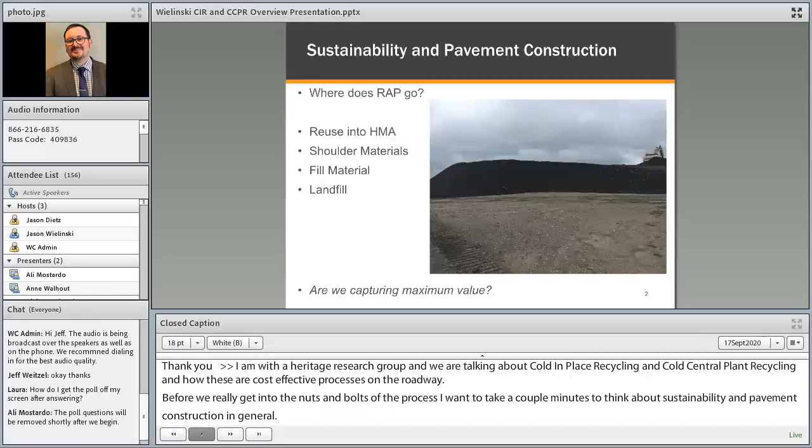Reclaimed asphalt pavement is a very valuable commodity. Ever since the advent of the milling machine in the 70s, we've been trying to find ways to reuse asphalt. As we develop more education and technology of how to reuse these materials, asphalt pavement has become the most recycled material in the world. There are opportunities where we can reuse it in hot mix asphalt and replace virgin material, which is an excellent use for RAP. There are other ways folks use RAP.

I see folks use it as shoulder materials or fill materials, or I even hear stories of how people use it in a landfill, and we're not really capturing or maximizing the value of that reclaimed asphalt pavement when we use it like that. So, thinking about sustainability and all the materials we use to build our roadway networks, I think about how do we create a need for continuing to develop and build growing pavement networks and programs, while trying to reuse a lot of the materials we've already invested in from an agency perspective.

I feel like we all have this responsibility to leave things in a better place than what we found it. I feel like when we can take materials and find a new home for them, whether it's RAP or other materials, and create less demand on virgin materials, we're doing the right thing.

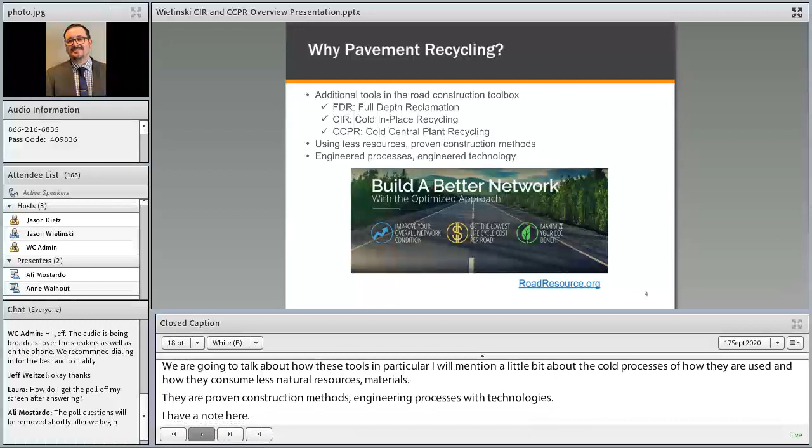So I have a note here, roadresource.org. This is a great tool for everyone to get more information, not only on these recycling treatments, but other pavement treatments, focused from the PPRA perspective, a really great tool, and we're going to dive into this.

So poll question number one: in-place asphalt pavement recycling can reduce construction greenhouse gases as compared to conventional mill and fill strategies by how much? Just curious what everyone thinks from an eco-friendly benefit for using recycled materials over conventional methods.

We'll give it a couple minutes so everybody can vote. Still see some votes coming in. A lot of our participants, 30 to 40% being the leading one right now, followed by greater than 50%. Some of us are in the 20%.

So final results, survey says everyone was thinking 30 to 40% savings. Well, in all actuality, data and information out there suggests that in-place recycling can reduce greenhouse gases up to greater than 50% on projects compared to traditional rehab technologies.

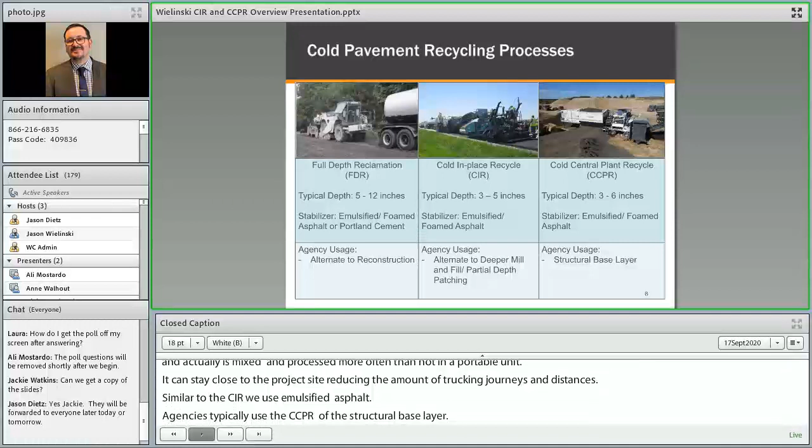Similar to the CIR, we're going to use an emulsified asphalt or a foam asphalt. And agencies typically use the CCPR as a structural base layer. So these recycle treatments, if we were looking at an AASHTO 93 design guide, some agencies suggest that they're up to 0.4 based on some research. Others use typically a 0.3 A1 coefficient, so much stronger than our aggregate bases that we're more accustomed to designing with, and getting awfully close to the design strength of hot mix asphalt as well.

Moving on to the next poll question, just wondering, for our agency folks out there: has my agency used the following treatments in our pavement network? Have we used FDR, CIR, central plant, 2 of the 3, all 3, or have we not used these treatments yet?

I'm really excited to see a lot of our participants have actually used all 3 of these treatments. That's amazing. We'll give it a few more seconds.

So many of us have used the FDR, 33 have responded using the FDR. 32 have used the cold in place recycle. Central plant, only 6 of us have used it. A few of us have used 2 of the 3. 25 have used all 3 treatments. And then a couple of us, 16 of us, have not tried these technologies yet. So hopefully for those that are looking for a lot more information on how to use these, I intend this presentation to help with a lot of that, to build some comfort level and information to share.

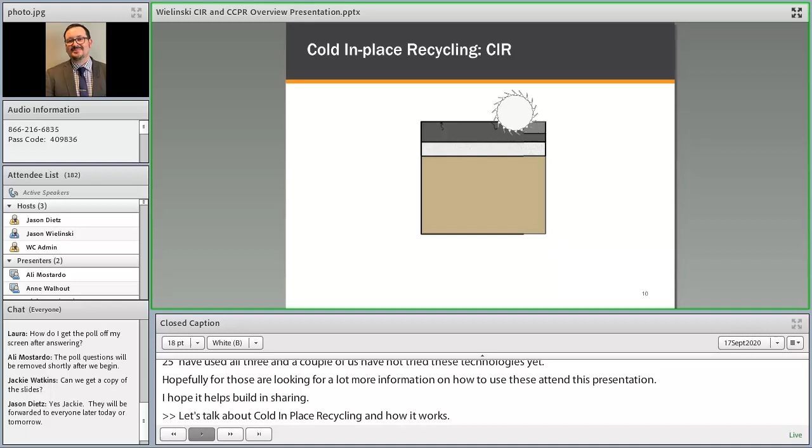Let's talk about cold-in-place recycling and how it works. Again, we're going to treat 3 to 5 inches of that existing pavement, thinking about pavements where that distress is a little deeper than just on the surface. We're getting deeper into it, and that milling machine is going to go through, take that RAP off. We're going to add a stabilizer to it, and we're going to pave it right back in place on top of the existing pavement without disturbing underlying layers.

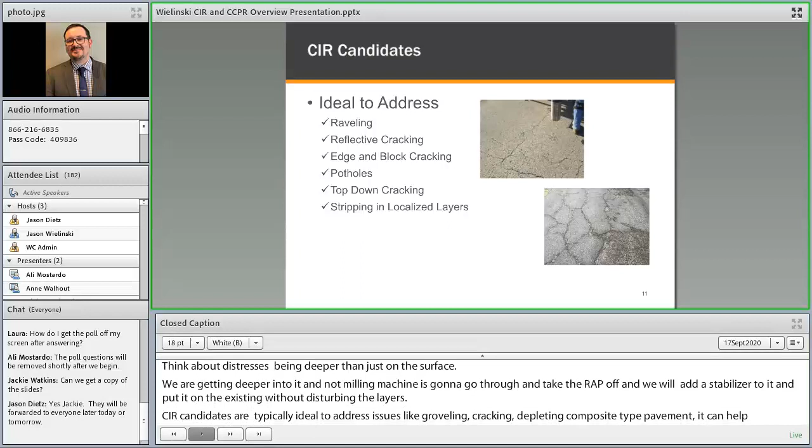CIR candidates are typically ideal to address issues like raveling, reflective cracking into the asphalt pavement, including composite-type pavements. It can help with edge and block cracking, age-related cracking, potholes. It can also help with stripping in localized layers. So as long as you can touch and grab it and get that stripped layer and get it mixed up throughout the rest of the pavement, we can remix that material and lay it back down in place for a good performing structural layer.

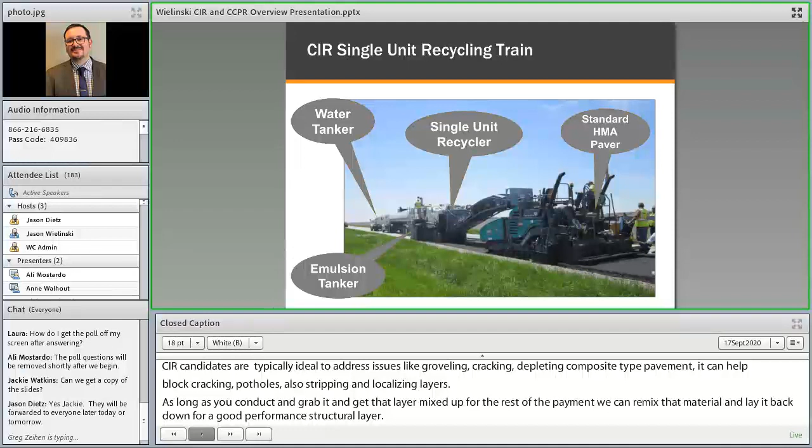This is an example of a single unit recycling train. It's pretty awesome the first time you see it, how you're so accustomed to seeing material getting removed from the roadway, and we bring a bunch of materials, come back, and we lay virgin materials in conventional methodologies. Well, we do that in this process. We eliminate all the trucking. It gets milled up, gets added in the stabilizer, gets added in that recycler, and it goes right back into the paver and gets laid down in place.

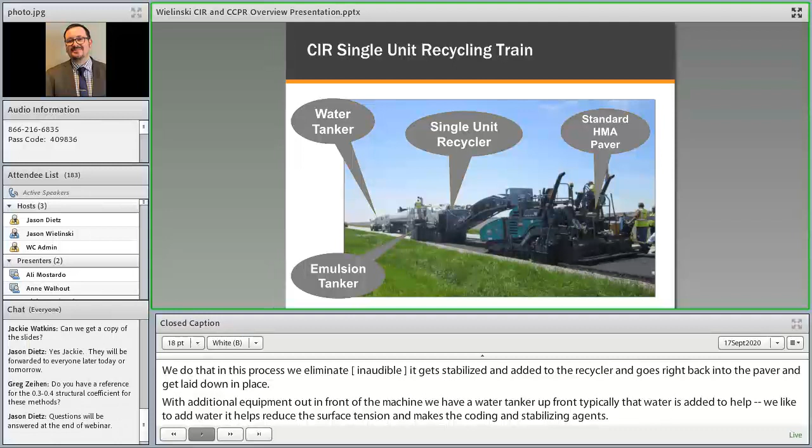We have some additional equipment out in front of that milling machine. We have a water tanker up front. Typically that water is added to help reduce the surface tension on the RAP and helps with the mixing and the coating of our stabilizing agents. And then we have our stabilizer tanker. In this case, it's an emulsion tanker delivering emulsion into that milling machine, and it goes straight into a standard HMA paver in this case.

There's also some other units, including a 2-unit train where it's a milling machine, picks it up, screens the material, mixes it, and puts it into the paver. I guess the important part is a specification can be written so that any type of cold-in-place recycling machine can show up and successfully perform a job. As with any types of machine, there might be some advantages with one over the other, but what I've found over the years is all these types of equipment can successfully build projects as long as the logistics are understood and the expectations are really understood.

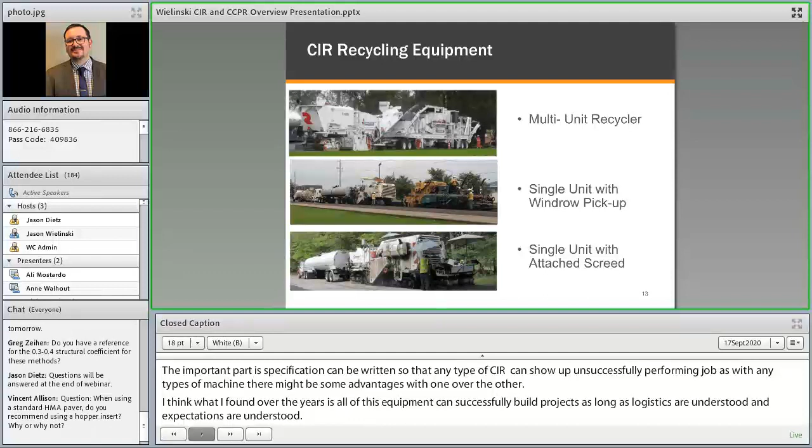Self-propelled milling machines with accurate spray pumps so that we are properly adding the stabilizer to the RAP milling, and then having the necessary lay-down equipment to successfully lay down a smooth mat to the correct lines and cross slopes.

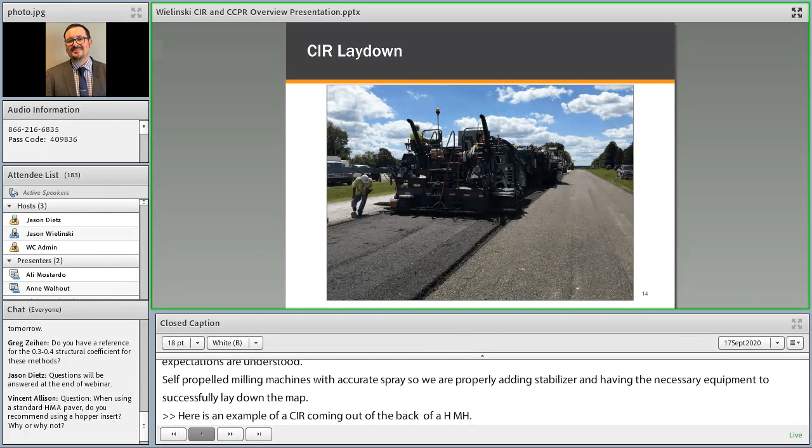Here's an example of a CIR mat coming out of the back of an HMA screed. You can see they're laying a CIR mat adjacent to a previously laid mat, just to give an idea of what these materials look like. It's definitely not hot mix asphalt.

It doesn't have that high black sheen type appearance we're accustomed to seeing with HMA mixtures. It comes out looking dark with some of the moisture present, and as it cures and develops strength, you can see it change colors a little bit.

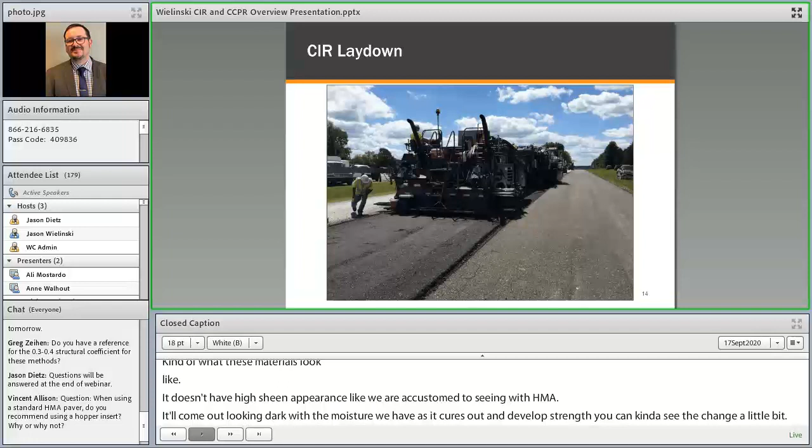Typically we use HMA paving equipment, heavy-duty pavers, good production, holding line and cross slope. We can successfully place and lay these types of materials.

Compaction is also relatively similar to hot mix asphalt. Typically we see 2 to 3 rollers on a CIR job. Usually we start off with a double steel drum roller in vibratory compaction mode to get initial density in these materials, and then...

Nearly all the specifications I'm familiar with also require a rubber tire roller, which does a really effective job of kneading compaction. With these materials being cold, the rubber tire helps orient the RAP particles and build really good density, which in turn builds really good strength in these CIR layers.

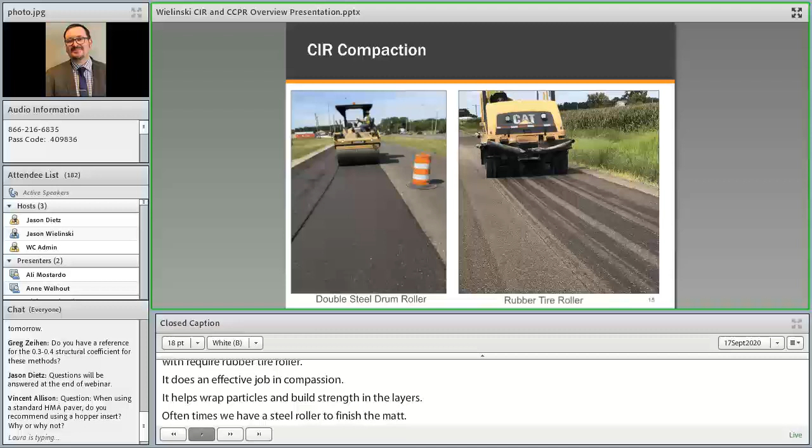Oftentimes we have another double drum steel roller to finish the mat after the rubber tire. Typically we see 2 to 3 rollers on these jobs to get sufficient density and, in turn, performance on these recycled type mixtures.

Here's an example of a CIR mat, a fresh CIR mat adjacent to one that had been laid a couple of days earlier, just to get a visual idea of what the material looks like.

The mat on the left was just placed when the picture was taken and is in the process of being compacted. You can see it's a little darker as the emulsion and moisture are beginning to escape from the pavement. Looking at the adjacent lane, it's a little grayer, a little duller.

While the moisture introduced in both the emulsion and the milling process is getting out, we're seeing what a typical mat might look like.

It's good to note that cold recycle - FDR, CIR, central plant - it does require a wearing surface. These materials typically have a higher void content than we typically see with HMA pavements.

When I say that, I don't want to paint the picture that it looks like an open graded friction course or a permeable drainage layer. It still looks like a tight mix, but we have a lot more smaller voids in it.

Which means it does have the ability to take on moisture, and we need the ability for it to release that moisture as well before we put our surface on top of it. Highly recommended to do that before winter, ice, and freezing in our northern climates.

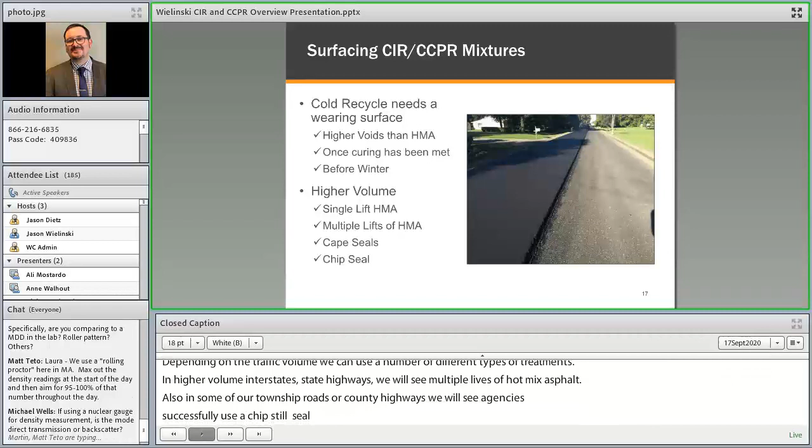At the end of the day, it's important to get the surface on these recycle layers and to ensure that we have the right type of surface based on the traffic that pavement's going to see.

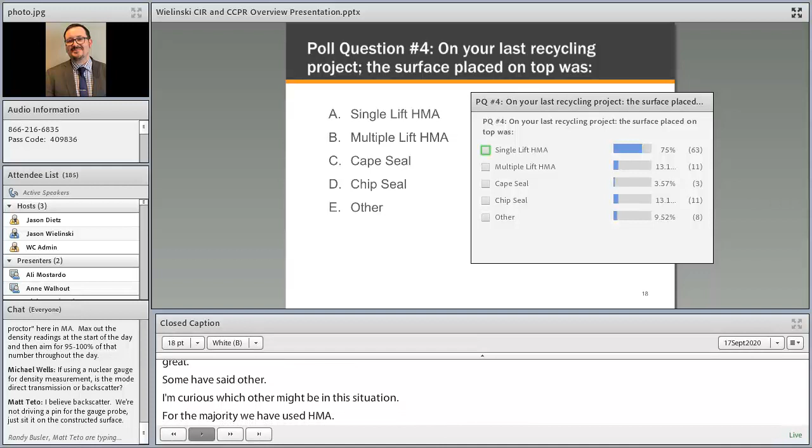So the recycle processes have a couple of main components that comprise the materials, and the first one being the reclaimed asphalt pavement, and for CIR it's the existing HMA.

We add a recycling agent, stabilizing agent, typically in the 2 to 3% range by the dry weight of the aggregate. In the CIR application, we're using an emulsified asphalt, or a lot of us are using engineered emulsions, emulsions that are formulated and designed to meet project requirements based on strength and cohesion development. Other agencies and contractors are using a foamed asphalt system, which acts as a stabilizing agent and gets good strength and performance in the CIR.

Other options include having some additives included in the recycle process, and sometimes we'll add a small amount, around 1% Portland cement, just to help with strength and stability and rate of strength development. Other agencies and contractors have successfully used quicklime or hydrated lime to help with adhesion. Some folks have used lime slurry, also to help with adhesion properties of the mixtures.

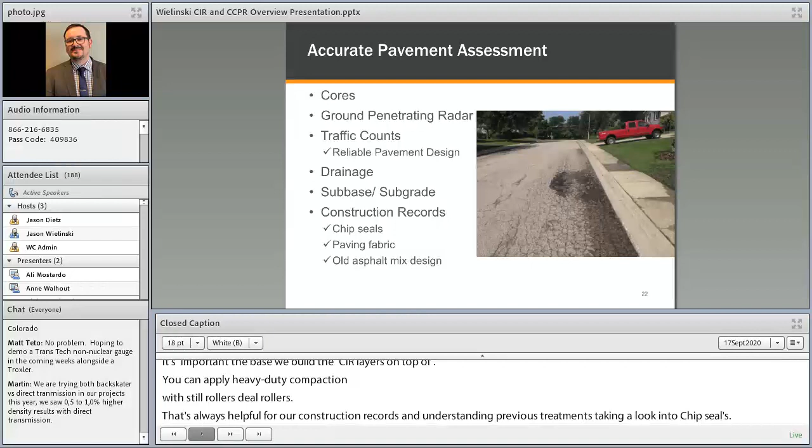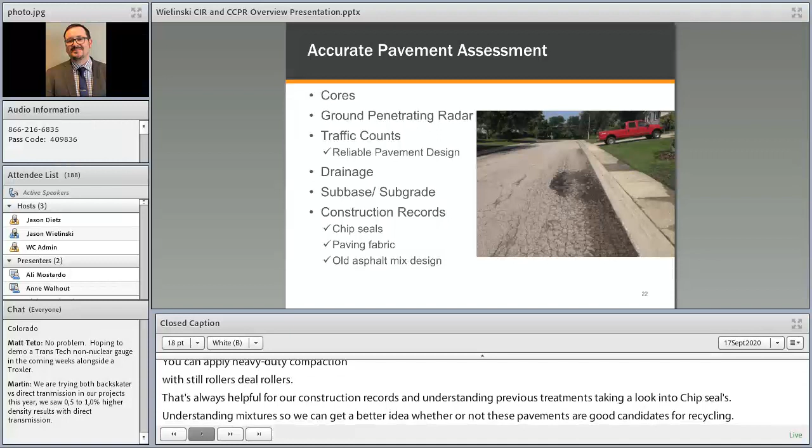It's always helpful to have construction records, understanding the previous treatments, taking a look to see if we're incorporating chip seals, if we're going to encounter paving fabric, and understanding what types of asphalt mixtures are hiding out in that pavement, so we can get a better idea of whether these pavements are good candidates for recycling. In the case of paving fabric, I've seen a lot of contractors successfully recycle pavements with fabrics. It's just having knowledge and understanding of it up front so they can plan for it.

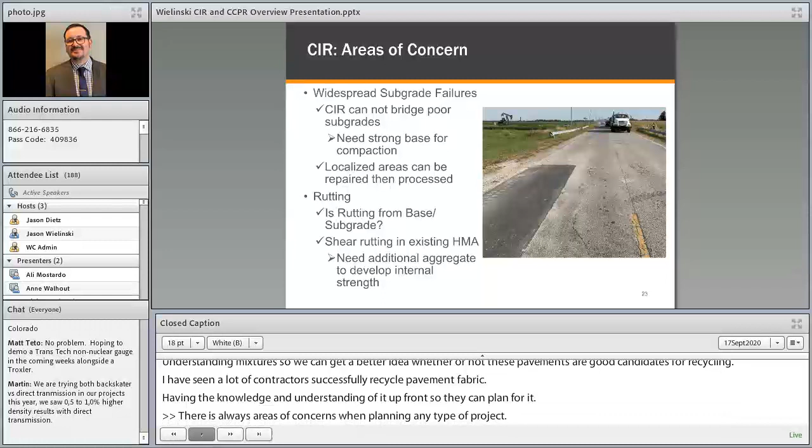There are always areas of concern when planning any type of project, and the first one I get real anxious about when looking at a road is understanding the subgrade of the pavement. Widespread subgrade failures, CIR might not be the best treatment for. I mentioned earlier that we need a good solid base to build density against.

If we have localized areas, we might have the opportunity to treat the subgrade problems, strength issues, drainage issues ahead of the CIR, and then come in and recycle through those patches. In this picture, you can see that we're recycling this pavement, and on that shoulder we had a soft spot where the agency dug out the soft subgrade, replaced it with aggregate base, and filled it in with temporary HMA. The CIR process will go through that patch and eliminate those seams so we don't have a potential construction joint reflecting through the HMA once the CIR is done.

It's always good to understand the rutting if it does exist on a pavement. Is it from the base or the subgrade? If we've got severe failures in the lower layers of the pavement, CIR might not be the best treatment for that, because we're not really fixing the problem.

In other cases I've seen a lot of shear rutting in the existing HMA pavement, and that's another issue to be concerned about, because we're going to take that mix, crush it down, recycle it, and put it back together. It might be very important and valuable to understand and plan on bringing some corrective aggregate or additional materials in there to help alleviate a future recurring shear rutting problem with that potential CIR mixture.

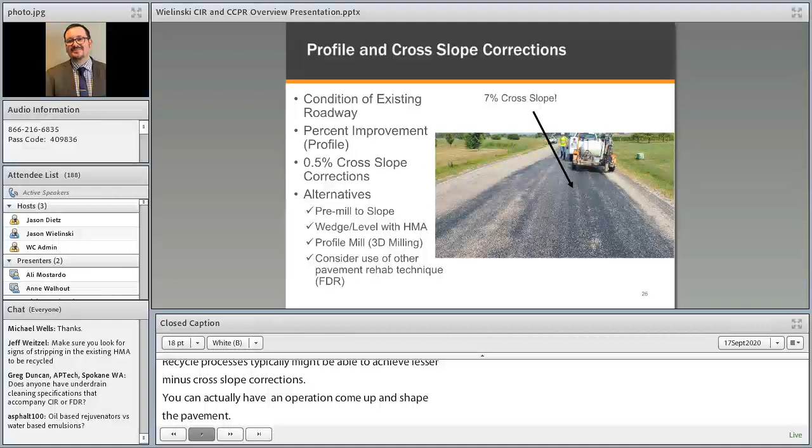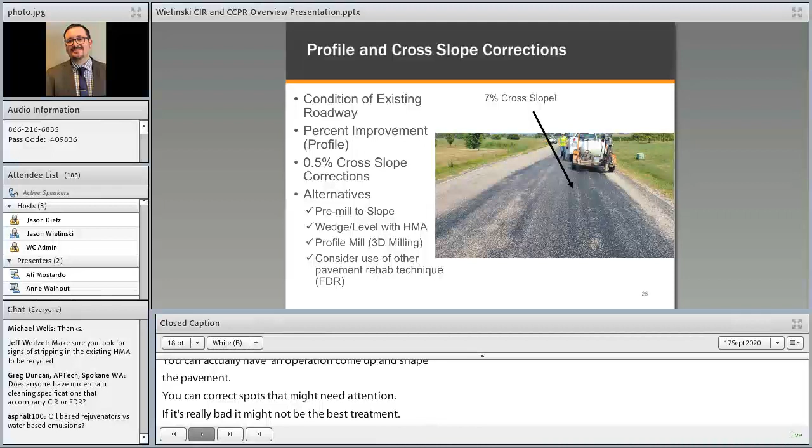So some alternatives to think about: you could pre-mill on that pavement, so you can actually have a milling operation come up and shape that pavement. You could also use some 3D milling. After the fact, you can do some wedge and level to help correct some spots that might need a little extra attention. And if it's really bad, it might not be the best treatment. So the FDR process might be a better treatment, for example, if there's a significant amount of crosslope issues that need corrected. It's one of those things that can be corrected with the two-step FDR process.

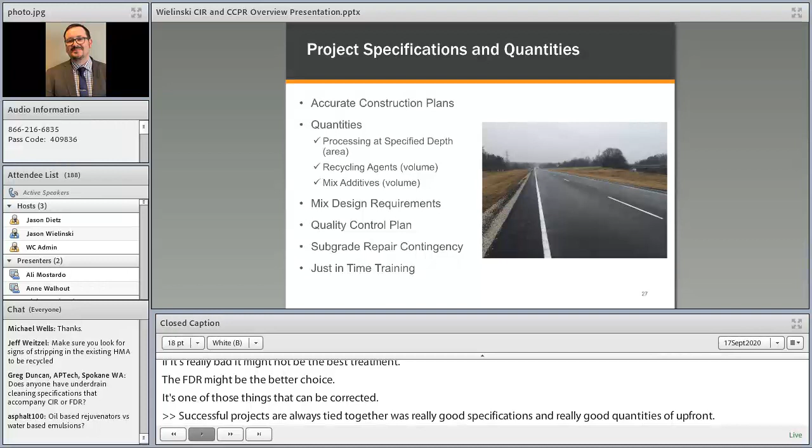Successful projects are always tied together with really good specifications and really good quantities up front, because in my opinion that really helps everybody get on the same page of what the expectations are, and that a lot of the homework's been done up front for materials, payment, and the process in general.

It really helps to have an idea on quantities. From the contractor's perspective, it really helps with planning when we're bringing out tankers of foamed asphalt or emulsion, understanding if additives are optional, required, or needed. Really helps with the bidding process and understanding the cost up front, what the treatment's going to take.

It's important that in those specifications, the contractors fully understand what the mix requirements are, quality control plans, and what is expected to be tested in the field to ensure that product is being constructed accurately.

I always like to have an idea of what a subgrade repair contingency is, just in case you hit a soft spot. How are we going to fix it? Are we going to dig it out and fill it with stone and HMA, for example?

And another tool that I think has been super helpful here in the state of Indiana, as we're learning how to build more of these across our state network, is just-in-time training. Just-in-time training is a small presentation where we get all the stakeholders together before the process, so our inspectors, our construction engineers, our materials engineers, the contractors, the QC personnel, and we walk through what the process will look like. Talk about the results of the mix design, talk about the equipment, talk about contingency if certain things occur in the field.

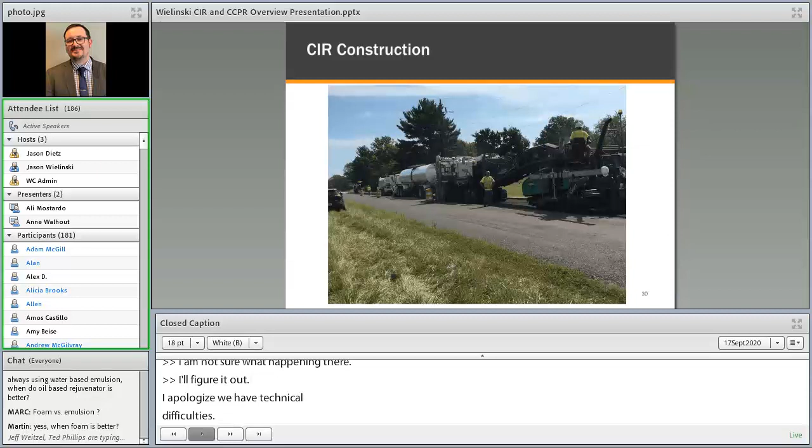So just a few things to think about as we are building these types of processes, and we'll talk about the construction process. So we're on slide 31. And the first thing we want to talk about is pavement sampling for a mix design. So once a project is identified, advertised, and successfully bid, typically the first step in the process is the contractor comes to the pavement and samples that project so that the contractor can put together a mix design for the recycle treatment.

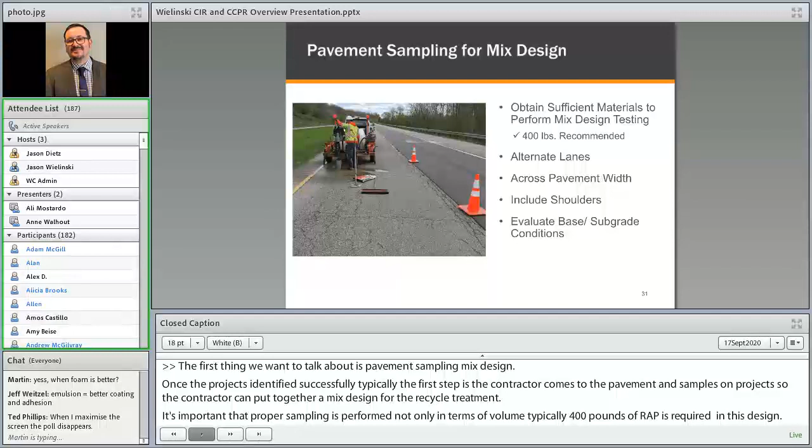And it's important that proper sampling is performed, not only in terms of volume. Typically, 400 pounds of RAP is required to successfully get through a mix design. But we want to make sure that samples are being collected in all lanes being recycled, and across the width of the entire pavement. There are a lot of times where we see pavements that have been widened over time, so the outside 3 feet of a pavement might be different than the inside 20 feet, where that pavement has been widened with a different type of material, or the shoulders were constructed with a different type of material. And it's important to include those if they're designed to be in the recycling process as well.

It's also another opportunity for the contractor to take a look at and evaluate the base and the subgrade issues. Typically what we'll use is a dynamic cone penetrometer to take a look underneath the asphalt pavement, just to get an idea if we see any soft spots or potential issues underlying the pavement.

So moving on, poll question number 6. What is the recommended spacing of field sampling and testing? One core per total job, multiple cores in one location, multiple locations across the entire pavement, adjust depending on unique areas that would otherwise be missed, or staggering cores across the entire section of pavement. And I think in this question, there might be more than one right answer. All right, we'll let it go for a couple more seconds.

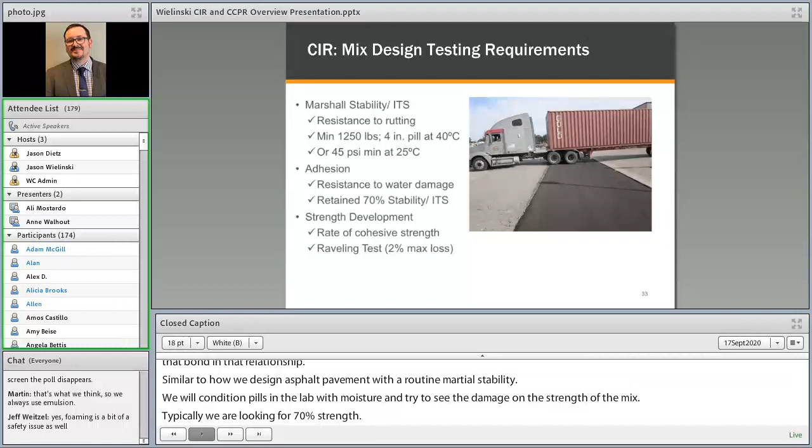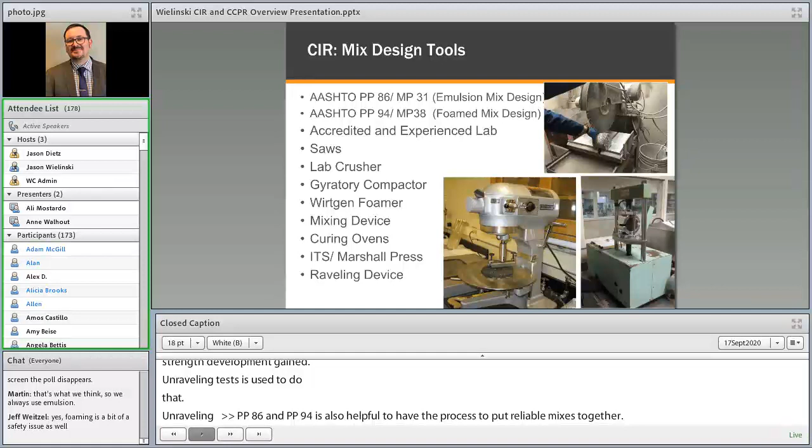A working foamer is needed if we're doing a foamed asphalt design because it simulates the foaming process in the lab that happens in the milling machine. We need different mixing devices, curing ovens, Marshall presses. Here's an example of that raveling device - it's a Hobart mixer that takes a partial cure sample around, and we want to look for mix loss over time.

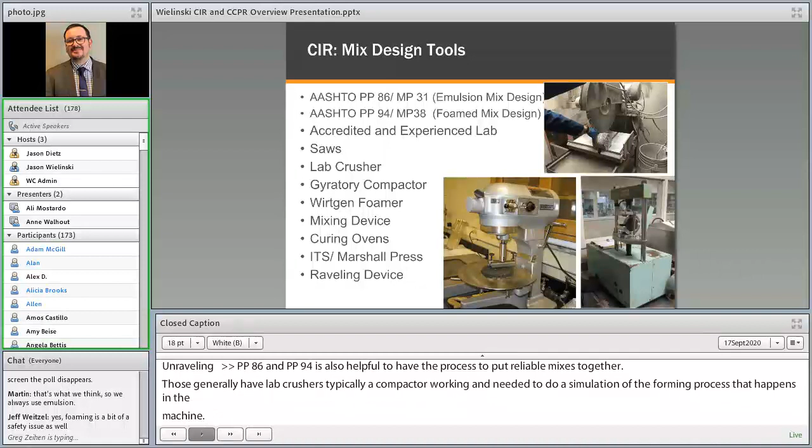Once we get out in the field and everything's ready to go, it's always important to think about safety on the job site, particularly maintenance of traffic - understanding where cars are coming in and out and how they're going to get around the job site. In terms of foamed asphalt projects, it's really important everyone's cognizant that that is hot asphalt in those tankers when hooking up to the milling machine. Typically that stuff is greater than 320 degrees Fahrenheit.

Always need to understand and respect the size and speed of the equipment. It's good for the contractor to have a spill plan in case there is a leak as they're transferring hoses, switching out tankers, and understanding how to respond to that in case it does happen.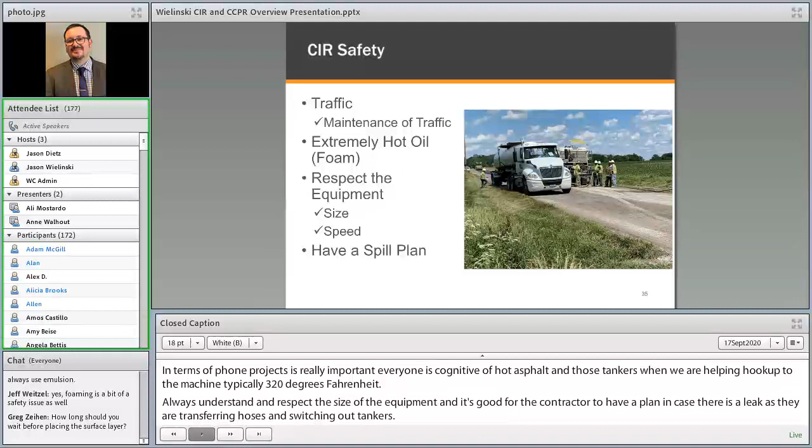Traffic control goes along with safety. The safest projects are always closed and open to local traffic, but with some projects that's not always doable. So it's important to understand the size and width of the equipment as we're trying to put traffic in and around the construction crews. Here's an example of a project where the CIR machines are going down the road and we're using the inside shoulder to keep moving live traffic around the CIR operation.

It's always a good rule of thumb to have a work zone of 2 miles or less. The paving train moves against traffic - that prevents vehicles from stopping on a fresh mat as they wait for the flagger to let them go through. Flaggers are always needed, pilot cars recommended if sight distance remains a problem, and always keep your head on a swivel out there because there's a lot of moving parts - rollers, tankers, water trucks, milling machines, live traffic.

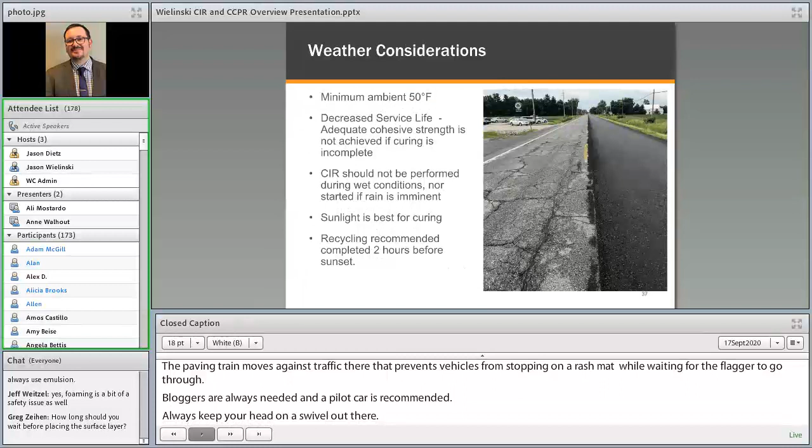Weather considerations are important for these processes. It's important to have a minimum ambient temperature of 50 degrees in most cases to get the emulsion or the foamed asphalt to activate and stabilize the materials. If we have reduced temperatures, it can reduce the service life of the CIR because it doesn't have the ability to gain strength as that water is curing out of the emulsion. So it's important to be cognizant of when these are going to be built also.

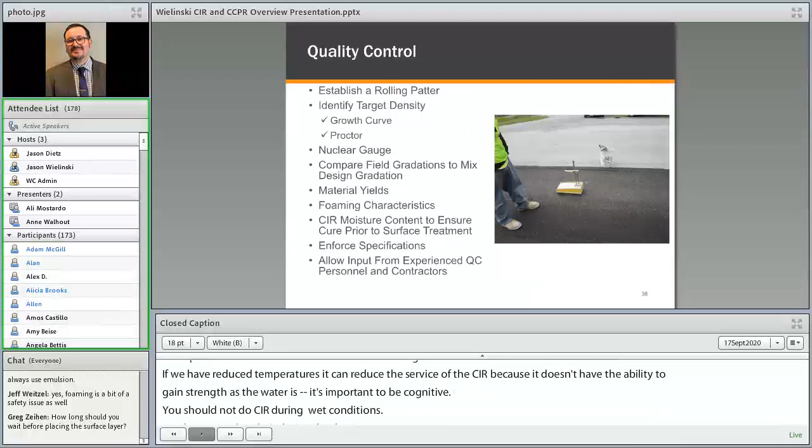We should not do CIR during wet conditions or if rain is imminent. It's always good to do these during the daytime. Sunlight is best for curing, and recycling is recommended to be completed 2 hours before sunset.

Quality control, always good to have a good solid plan up front. First thing is establish a rolling pattern. Identify a target density. Generally with a nuclear gauge, we're going to do a growth curve and check a peak. Generally with these being 3 to 5 inches, we're going to use backscatter on the gauge. I've seen other folks use a wet proctor to set the peak density number or target density, and then with the gauge we're going to have a typical requirement of 95 to 103% of that target density.

We like to take gradations in the field to compare to the mix design to ensure that we're going to have similar expected results to the mixed design in the field. We always want to check our material yields to make sure that the equipment is metering in the desired stabilizing and additive types. We always want to check the foaming characteristics if we're using foamed asphalt. We want to check the moisture content of the CIR prior to overlay. We don't want to trap moisture in that mix, and we want to make sure that it's not overly wet to create issues in the hot mix that's going on top of it.

Be sure to expect those conditions to be met, and always ask for input from experienced QC personnel and contractors, because there's a lot of experience and there's a lot of conditions that we can overcome in the field with the right planning ahead of time.

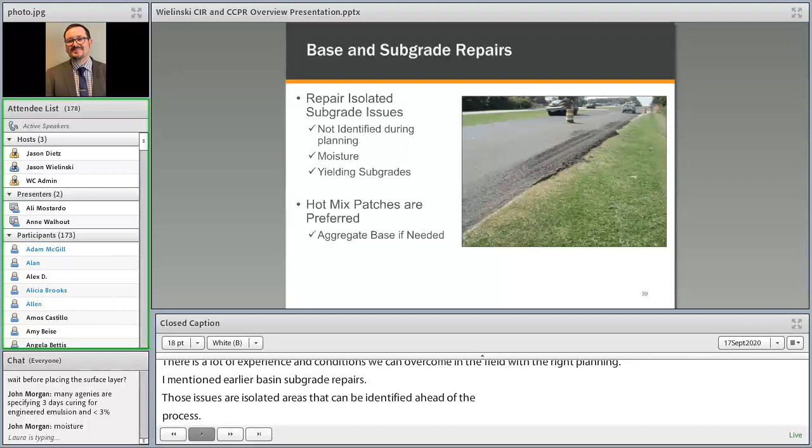A little note on curing. Rolling traffic is helpful to help drive moisture out of the mixtures. Sunny and hot days will help accelerate that cure, and when it rains, it does kind of pause it and slow it down. So it's important to understand ambient conditions as that material wants to dry out and gain strength before we get it covered. Typical specifications are 2 to 3% or below in the CIR mat before we want to cover it.

And we really don't want to apply those surface courses on top if there's too much moisture. For one, if we trap a bunch of moisture in, it might damage the CIR over time, and it can also impact the constructability of the hot mix on top. If there's a bunch of moisture hiding out in the CIR layer and we put that hot asphalt on top of it, that moisture can wick up and create some constructability and some tenderness issues with that hot mix asphalt. So it's really important as part of the quality control that we make sure that moisture is out of that pavement.

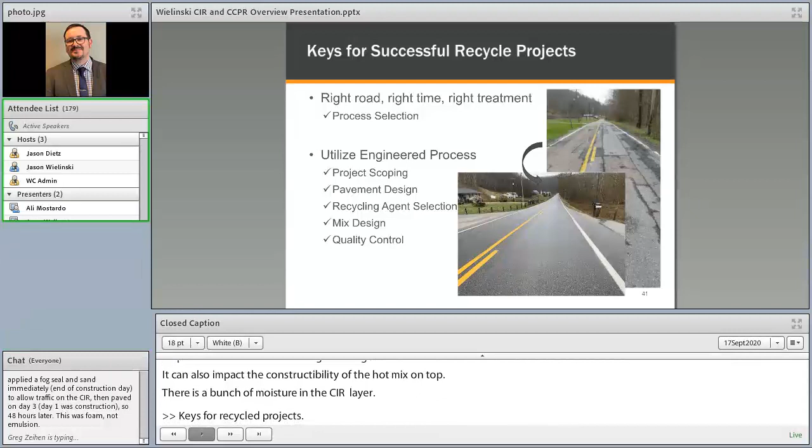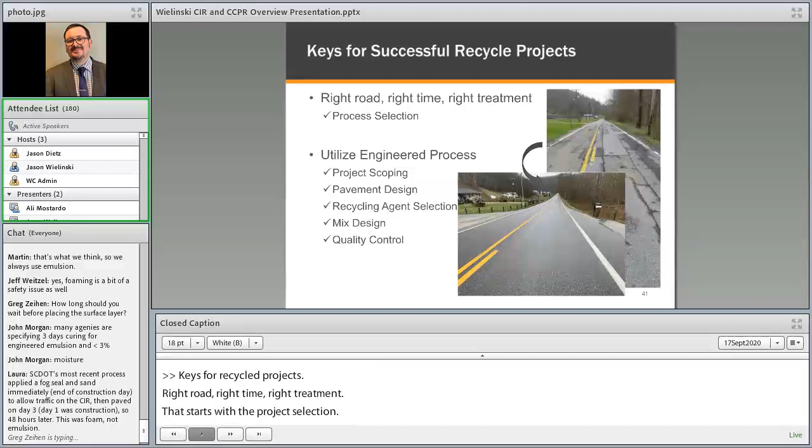And again, key for recycle projects: right road, right time, right treatment. It starts with the project selection. Utilize that engineered process with the scoping, the proper pavement design. Think about the right recycling agent for your project. Get a good mix design done, and make sure that we're getting the right quality control in the field.

So would like to do a little project walkthrough. The project I'd like to share is one that was constructed in the state of West Virginia back in 2015. It was a 4-lane divided highway, high-speed route, pretty rough shape. It was a composite pavement, asphalt on top of concrete. We were looking at 64,000 square yards of CIR that was going to get covered with a 2-inch HMA surface.

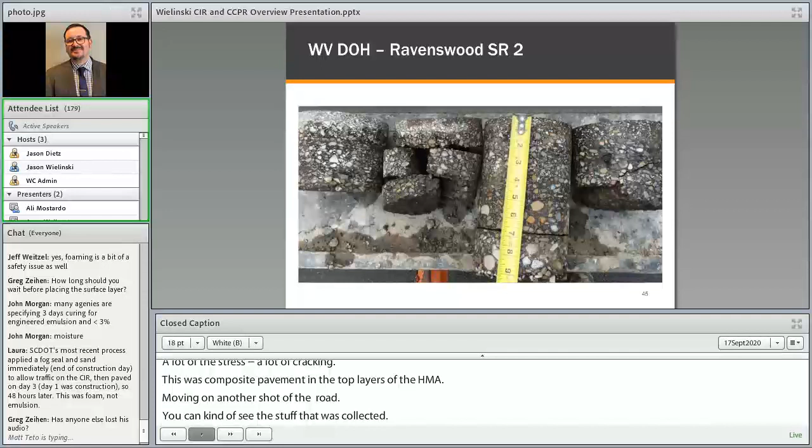Another shot of the road there, and you can kind of see some of the distress that we saw in the cores that were collected. So a lot of cracking throughout the top 4 inches that were going to be targeted to be treated with the CIR. Maybe some potential stripping issues in some of the second and third layer.

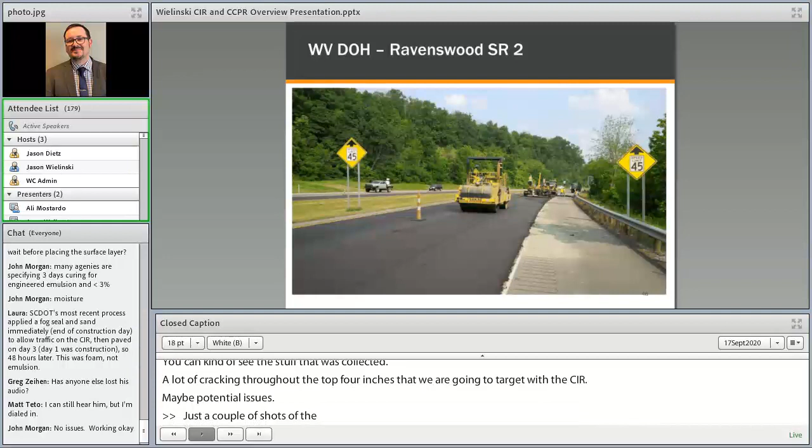Just a couple shots of the process. We could see that the compaction of the CIR is happening behind the paver. And I would like for everyone to note the shoulder that's tied adjacent to it. The shoulder wasn't treated in this case.

Shoulders are real tricky in the sense that, as I mentioned earlier, the CIR has a higher air void content than HMA, and in this case a really old HMA pavement. Think about shoulders and how that might retain moisture if there's a rain event. I always recommend agencies to think about shoulders because we really don't want to create a bathtub if there's significant rainfall, and we have to worry about that moisture getting out and extending the curing time, if you will, before that HMA overlay can go on.

Here's another picture of the completed CIR mat. Again, you can kind of see the inside shoulder there getting constructed. So a shot of the mat, completed pavement.

And we're always curious about, well, it's a recycled pavement, how's it going to respond to traffic in real time after compaction? The guys at West Virginia DOT, particularly Travis Wallbach, shared these photos with us in other presentations. And I love this picture of the semi coming across, turning across this mat at an intersection in this highway.

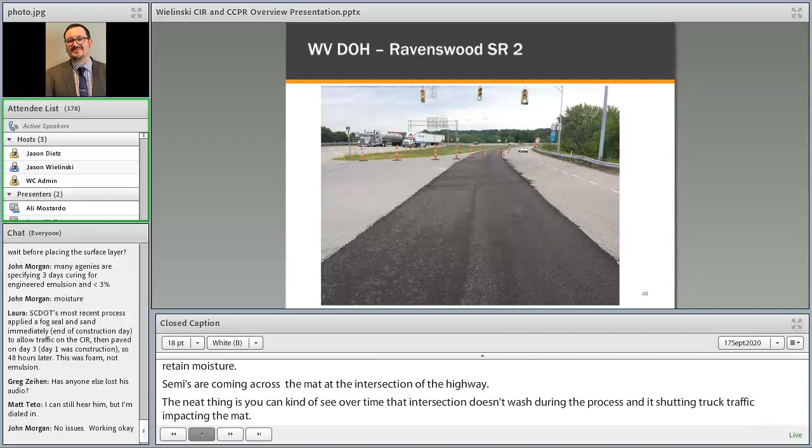The neat thing is you can kind of see over time that intersection was definitely watched during the process, and that slow turning, shoving truck traffic didn't really impact the mat. You might see the tire marks on the top, and you could see some roll off to the side at the cold joint, but that mat really didn't distort, rub, or shove after traffic.

You can kind of see another shot of the emulsion tanker as it's leaving the project. And those wheels as they turn, they kind of shove laterally a little bit also. And we didn't have any issues with the roadway there.

So how does it look now? This was a picture taken back in 2018. Roadway looks pretty good, no reflective cracking coming back up through the concrete yet. Again, that was only after 3 years.

Another shot of what that intersection looks like. So no rutting from the slow stop truck traffic there at that intersection. Took another shot of that roadway in March of '19 after another winter. Again, we didn't see any reflective cracking coming back after 4 years.

Now if we take a look at it now, this picture was shared with me by the West Virginia guys a few weeks ago, and that pavement's in really good shape, and it's not showing any rutting or appreciable cracking at all.

So how do you measure performance? One way we often do that is ride. The International Roughness Index is a measure of smoothness, and typically a higher number represents a really rough ride where a lower number is smooth.

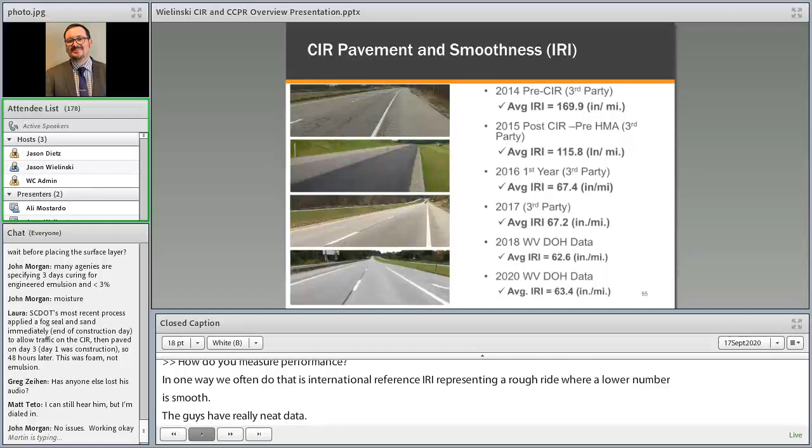The guys at West Virginia shared this really neat data where we did a 170 before the CIR. It was actually measured after the CIR, it dropped down to a 115. After the HMA was placed, it was below 70 at 67. And today, as we continue to measure ride on that pavement, it's still in the low 60s. So in terms of ride and smoothness, it's performing quite well.

Moving on, poll question number 7, just curious, what is the maximum allowable RAP in your state HMA mixtures? Just curious what everybody can put into their HMA in terms of RAP. Give it a few seconds.

Leading candidate is 10 to 25%. Some folks are using 25 to 40%. That last one should be greater than 40%. Some folks do not allow RAP in HMA mixtures. Interesting. We'll give that a couple more seconds.

So in general, 10 to 25% RAP is generally accepted into hot mix asphalt. So as we take RAP off of projects, only 75 to 90% of it's going potentially right back in. So just want to think about where does all that extra RAP go, and where can we find really useful homes for that RAP, because I think it's definitely an opportunity for us to think about RAP management and how we reuse a lot of the material that we've already invested in.

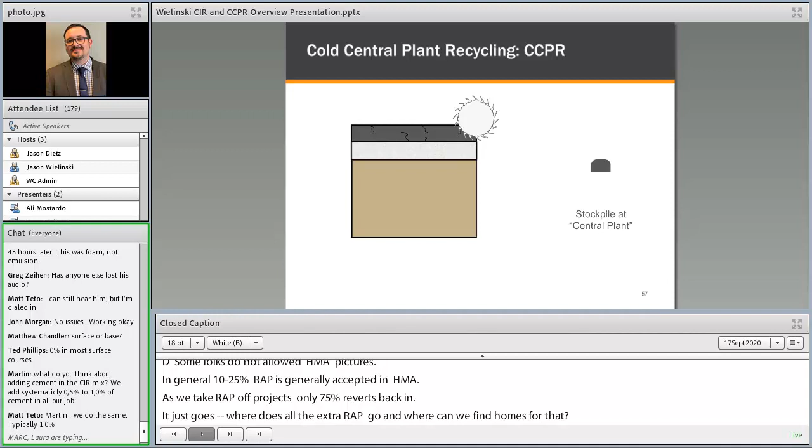Cold central plant recycling is the next treatment we're going to talk about. It's a neat treatment in the sense that we're going to take a distressed asphalt pavement and take it off, because sometimes we have to get below that asphalt pavement to see what's going on and fix it. It could be a base issue, concrete joint repairs, or base stabilization. We're going to take that asphalt pavement off the roadway, stockpile it at a nearby location, treat it, and place it back on the roadway after we fix that problem below the asphalt pavement.

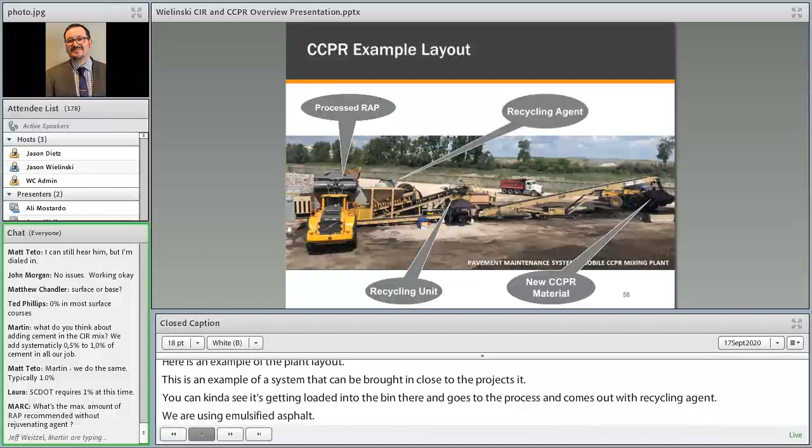Here's an example of a cold central plant layout. This is an example of a portable pug mill system that can be brought in close to the project site to process and coat that RAP. You can see it getting loaded into the bin, going through the pug mill process, coming out, getting added with a recycling agent. Similar to CIR, we're using emulsified asphalt or foamed asphalt. It goes into the pug mill where it's mixing the RAP with that stabilizing agent and comes out and gets stockpiled as a new cold central plant material, all cold. We're not adding any heat in this process.

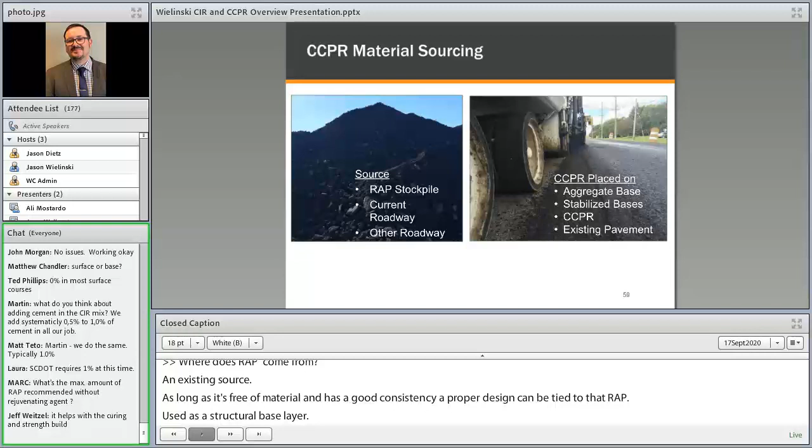Where does RAP for central plant come from? It can come from an existing RAP source. As long as that RAP source is free of deleterious material and has a good known consistency, a proper design can be tied to that RAP pile, and it can be used as a structural base layer on projects. It can come from a current roadway where we take that RAP, send it down the street for shipping and handling, fix problems below it, bring it back, and lay it back down as a base layer. Or we could take it from one roadway and use it as a structural layer on another.

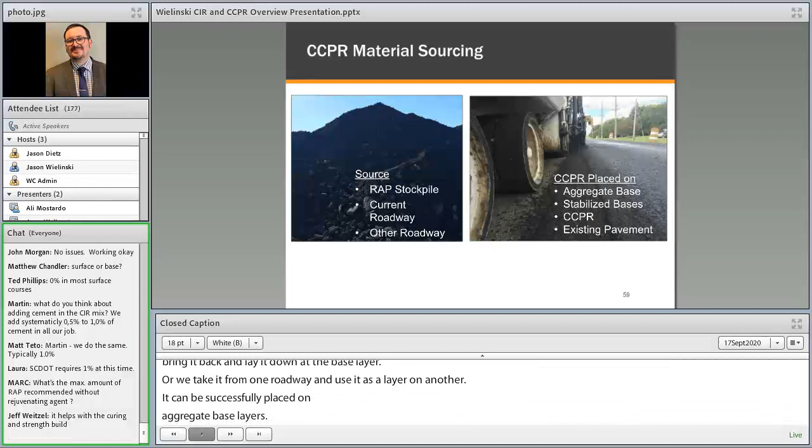It can be successfully placed on aggregate base layers. We see a lot of local agencies here in the state of Indiana and across the Midwest upgrading gravel roadways to hard surfaces using cold central plant type materials. We see it on stabilized bases, particularly cement FDR treated subgrades that needed some foundation improvement. We've seen double layers of recycles on top of each other. IDOT District 6 just did a pretty neat project where they used cold central plant in a double lift application to replace some shoulders. And we can place it on top of existing pavement if we need to add structure.

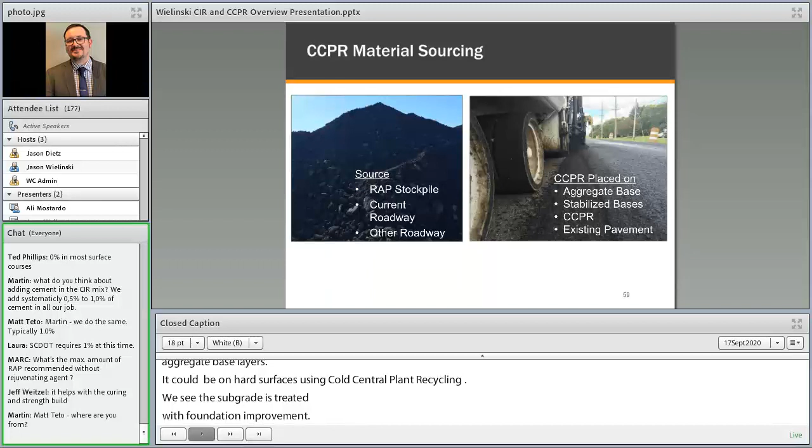It's really similar to the cold in place process, except we had this shipping and handling where we handle the material off the pug mill, load it into a truck, and deliver it on site. With these materials, I think it's good to have a window associated with workability. It's really important for the contractor, the material supplier, and the agency to all get up front about where that location is going to be so that material can be mixed and processed and hauled to the site with enough workability to get through the paver and build density in that mat.

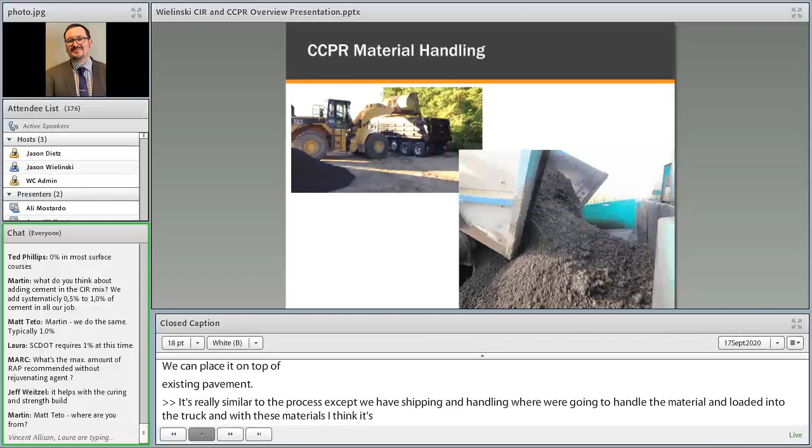When we think about the other similarities to CIR, we spent a lot of time talking about the construction process, the laydown, and the equipment, and it's very, very similar. Similar paver and roller requirements, mix design and QC - our requirements are very similar in these processes. And the pavement performance also is pretty typical since we're using a lot of the same types of materials at very similar application rates.

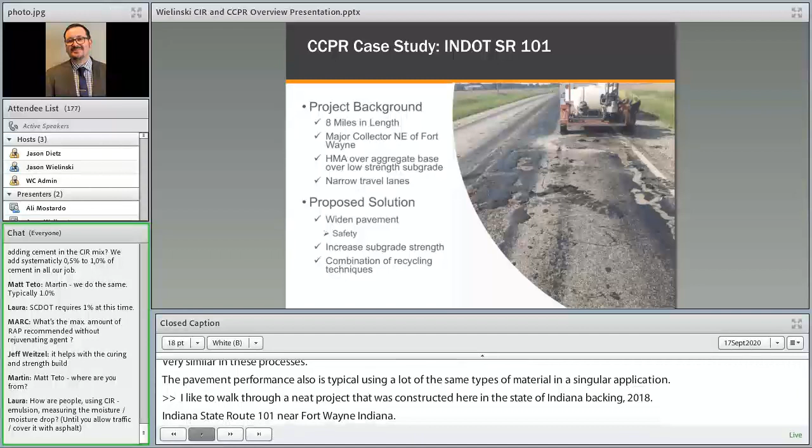I'd like to walk through a pretty neat project that was constructed here in the state of Indiana back in 2018. It's Indiana State Route 101 up near Fort Wayne, Indiana. It was an 8-mile project in length, a major collector near the Fort Wayne area. We had HMA over some troubled subgrade aggregate base. It was also a pretty narrow road, so widening was one of the desired outcomes for any reconstruction or construction process.

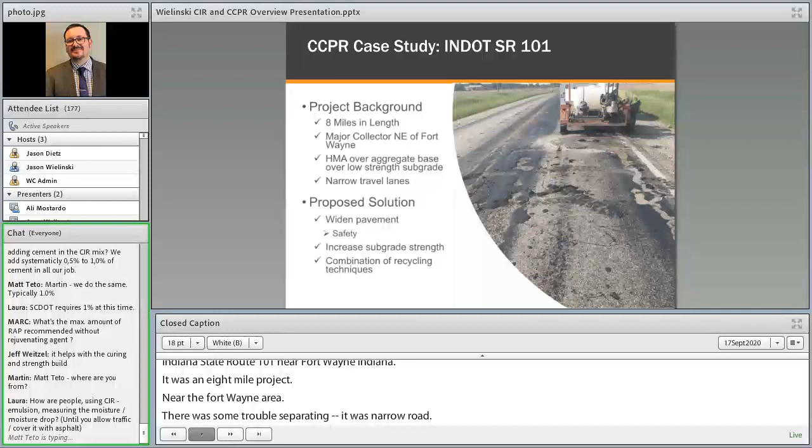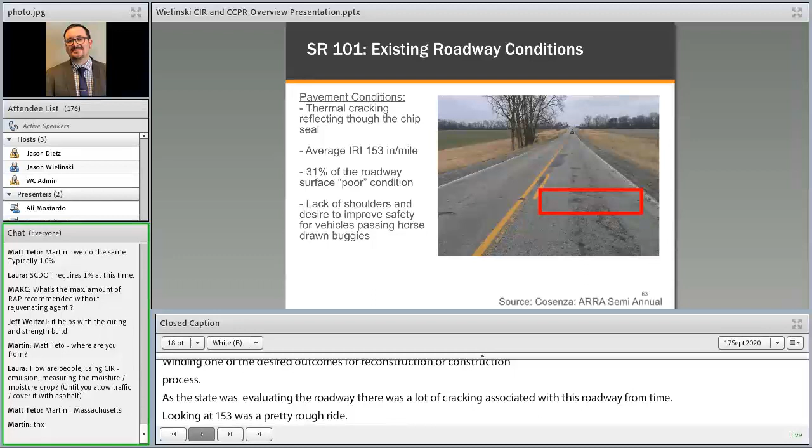As the state was evaluating the roadway, there was a lot of thermal cracking associated with this roadway over time. Looking at smoothness, this was a 153, so this was a pretty rough ride, and about 30% of it was deemed poor quality based on their pavement management system. The lack of shoulders really drove the state of Indiana to want to think about widening this pavement from a safety perspective. I really appreciate Nick Cosenza for letting me use the slides that I used last year at the ARRA Technical Conference to help tell this story, but it really goes to show what kind of problem this pavement had.

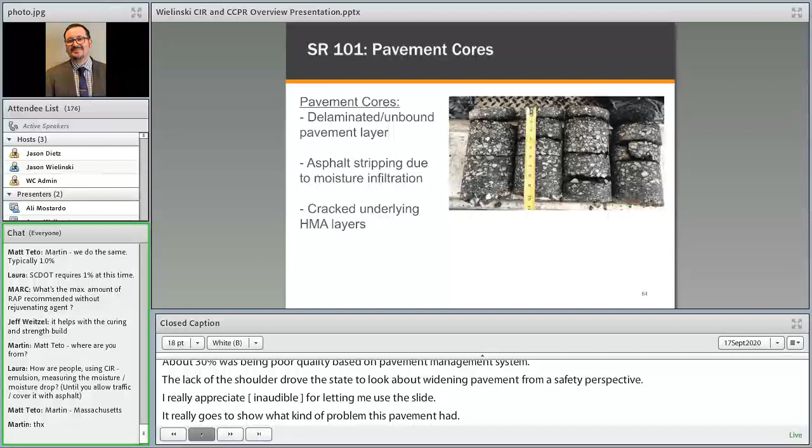A little note on the cores - it did have some delamination issues both with the surface treatment and within the cores. There was some asphalt stripping from moisture infiltration and a lot of cracking in those lower HMA layers.

This is a neat point in the Indiana DOT's knowledge and experience with recycling. They were writing specifications for CIR and FDR, and I think this project came up, and it was like, well, we really want to recycle the asphalt, but we know we need to get into the subgrade.

That's when we started talking and looking at the stuff that was going on with the state of Virginia and their Cold Central Plant recycling program. And it dawned on the engineers, hey, why don't we try this here? And we can couple the FDR technology with the Cold Central Plant technology.

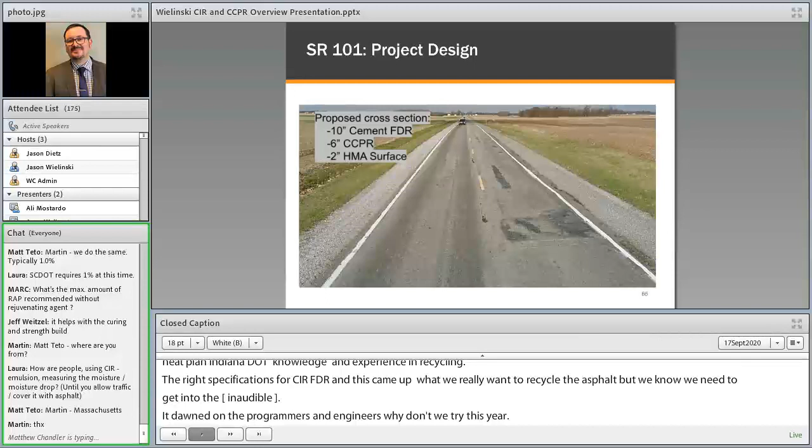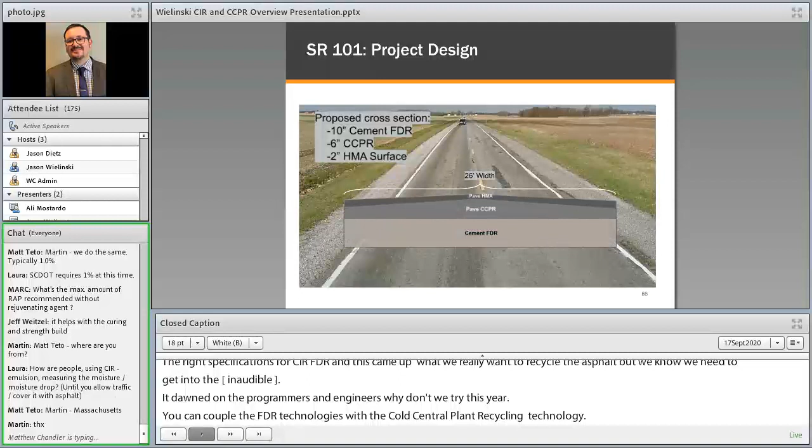So the idea was to take that existing 20-foot width pavement, take the existing asphalt off, and widen that base to 26 foot with the FDR process. We're going to pave on top 6 inches with the central plant recycling, and then cover that with a 2-inch HMA surface.

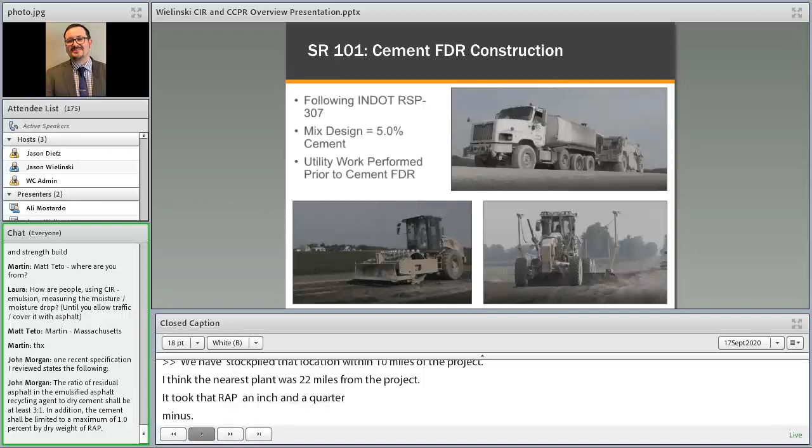Here's a look at some of the FDR operation. It followed the recurring special provision INDOT had at the time for cement FDR. They used 5% cement in the design, and all utility work and pipe crossings were performed before the FDR process, which was really important.

And just some interesting statistics about the central plant construction. At the time, it was recurring special provision 417 in that spec book. The mix design called for 2.5% engineered emulsion, which was added to the pug mill shown a few slides ago. It was laid down by a local HMA contractor to the Fort Wayne area, and 37,000 tons of that cold central plant mix was produced and laid in a period of 16 days.

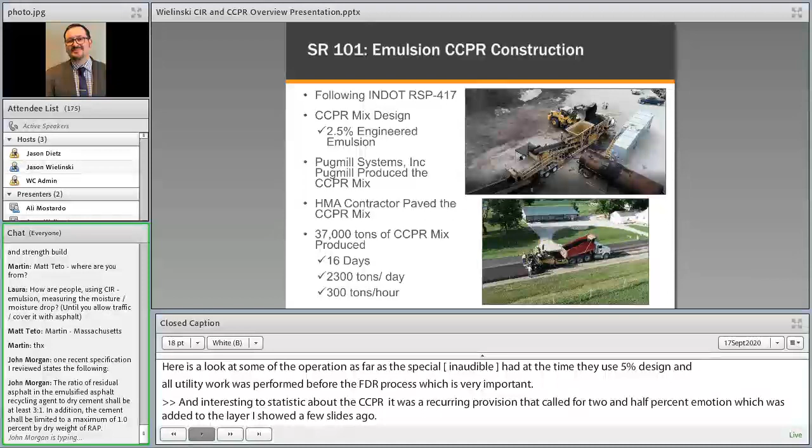On average, that plant and crew averaged about 2,300 tons per day, and that plant was clipping about 300 tons per hour. There's always this perception that these technologies are super slow, but I think the contractor really showed that production can be pretty good on this type of material.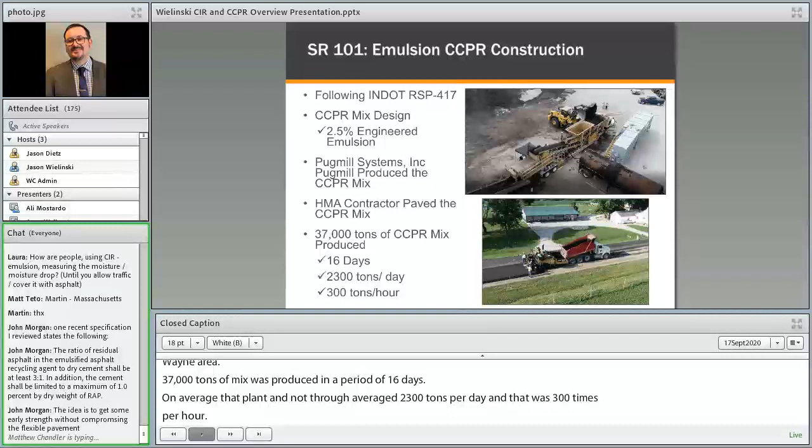When you're laying it 6 inches thick, the number of trucks you have to supply this project is critically important. So after the central plant was cured, the state of Indiana would do a profile mill or scarification mill on all our recycled surfaces to help true out cross slope and eliminate any bumps. The scarifications also help with the bond between the recycled layer and the surface. And we put a single lift 2-inch INDOT 12.5 millimeter mix on top of that central plant.

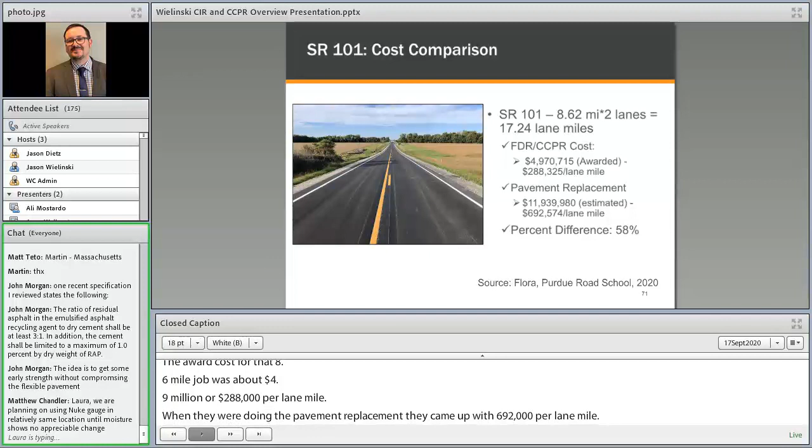I really have to thank Bill Flora with INDOT for sharing this information with us at the 2020 Purdue Road School. When INDOT was looking at the analysis for that 8.6 mile job, the awarded cost was about $4.9 million, or $288,000 per lane mile. When they were doing the pavement replacement estimates, they came up with $692,000 per lane mile. The percent difference they realized between those two, realized versus planned, was 58%. So there was a significant amount of cost savings realized by the state on this project.

And it's always important to know, well, what did we get? Again, Nick Cosenza at ARRA last year shared some of the pre-construction FWD testing, and it's important to see that when the blue line gets above the dash line around the 12 on the y-axis, those are deflections that are a little bit too high for comfort level. We also see the green line above the y-axis line, that's the subgrade deflection. So that's the information the department had up front to realize that pavement needed somewhat of a structural improvement.

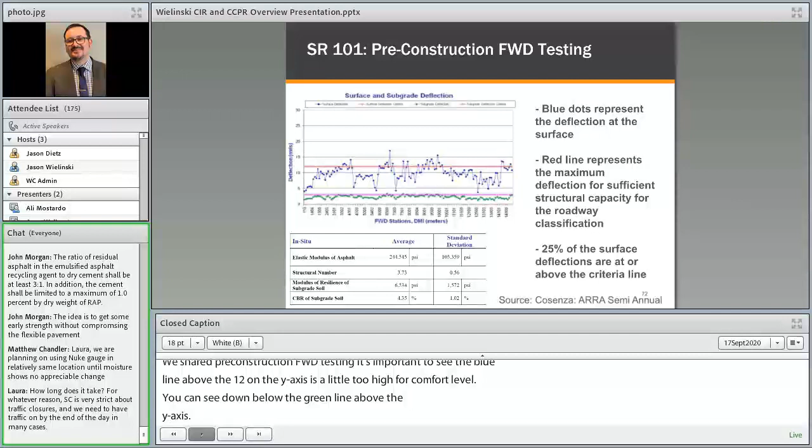After the FDR and the central plant construction, we can see that the blue line, except for a couple of outliers, consistently stays below that 12.5 mils that the state's looking at. It's also important to note how much tighter that blue line got, so they built a much more consistent pavement by taking it all out, treating it, and bringing it back with one continuous FDR-based stabilization process. They had a thick cold central plant recycle layer and a very good 2-inch HMA layer on top.

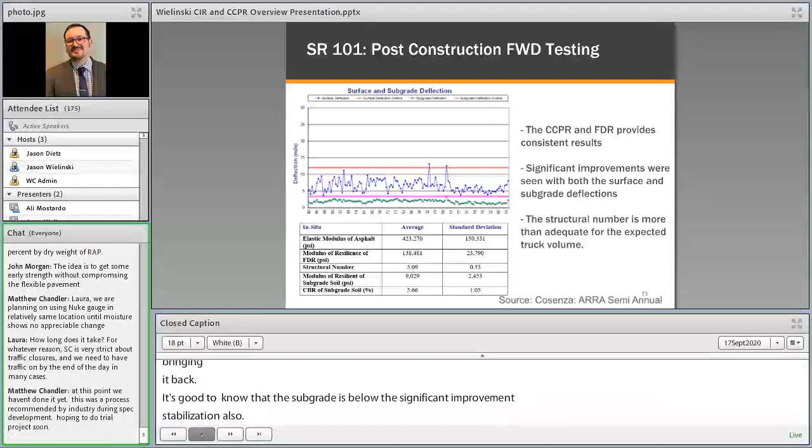Here's a shot of State Route 101 from spring 2020, so a few months ago. That pavement has an IRI of 65.4, so that is definitely going to be a pavement we continue to watch over time to better understand how these materials respond and perform in a relatively harsh, wet, freeze environment with significant rural truck traffic.

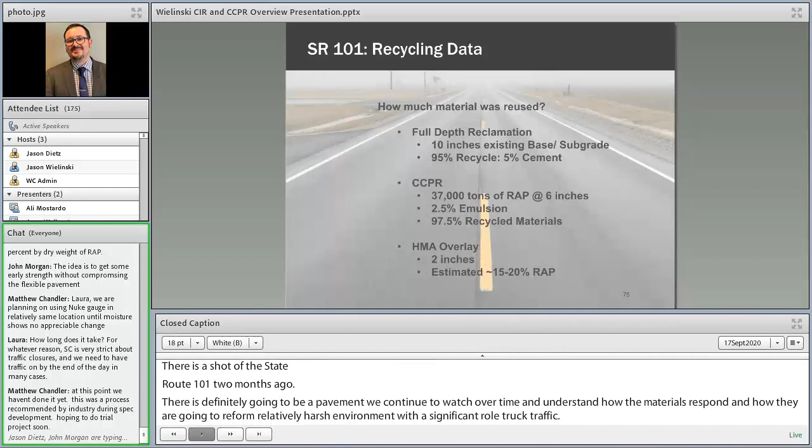So just thinking about the recycling data on this project alone, think about what was reused. We reused 10 inches of the existing base subgrade, which was 95% recycled with 5% cement.

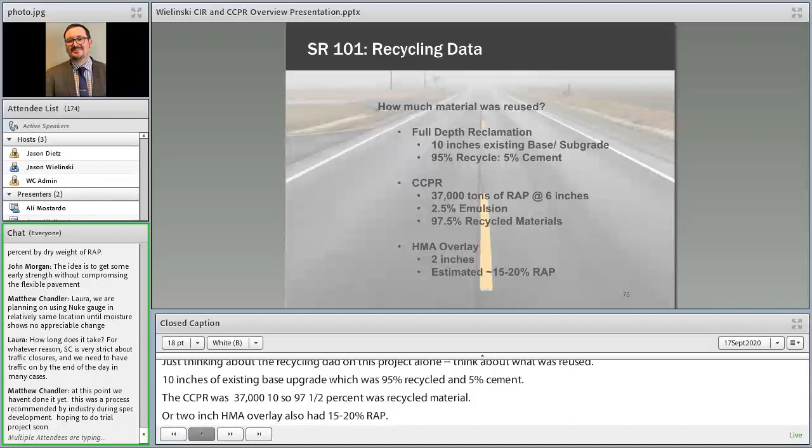The cold central plant material was 37,000 tons. We're adding 2.5% emulsion, so 97.5% of that 6-inch layer was all recycled. And our 2-inch HMA overlay also probably had 15 to 20% recycled content in it. So we did a really nice job of reusing a lot of the materials that were already in place for that part of the pavement. It's a really neat success story that we like to share here in Indiana.

So moving on, some additional materials for everyone to understand, some additional tools that are out there. The basic asphalt recycling manual was updated in 2015 and is a great tool. It was developed by FHWA working with ARRA, with a lot of information on all the recycling technologies.

There's a lot of work going on with specification development. I mentioned the AASHTO specs earlier for the materials and testing procedures. ARRA has best practice construction guidelines and mix design guidelines available to help develop specifications. Many DOTs have specifications available for reference that many successful projects have been constructed with.

It's also of note that NCHRP 14-43 is underway, where they are developing construction specification developments for CIR and cold central plant processes.

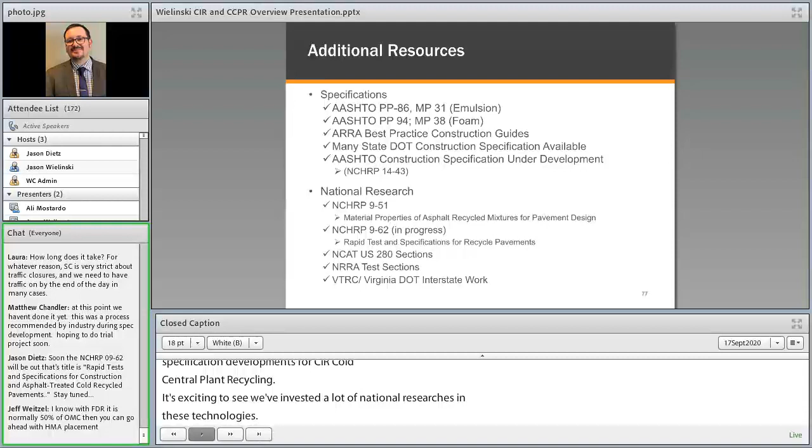It's really exciting to see that we've invested a lot of national research in these technologies. NCHRP 9-51 came out a few years ago, but it's a great piece of work showing how these materials can be analyzed in a mechanistic-empirical type format. 9-62 is in progress, a study where we're looking at rapid tests and specifications for QC tools for recycled pavements in particular.

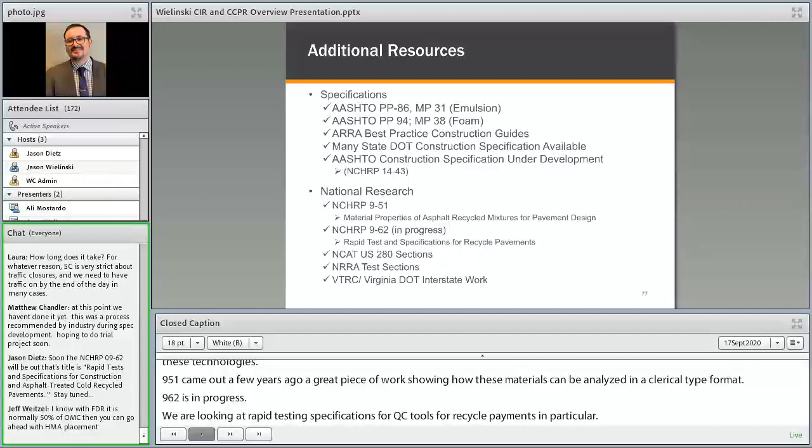NCAT and NRRA have test sections at their sites that they're investigating, publishing data and information on. And I mentioned earlier the folks at Virginia Transportation Research Council and VDOT have done a lot of great work sharing their experiences with recycled pavements and how effective they've been for their state agencies.

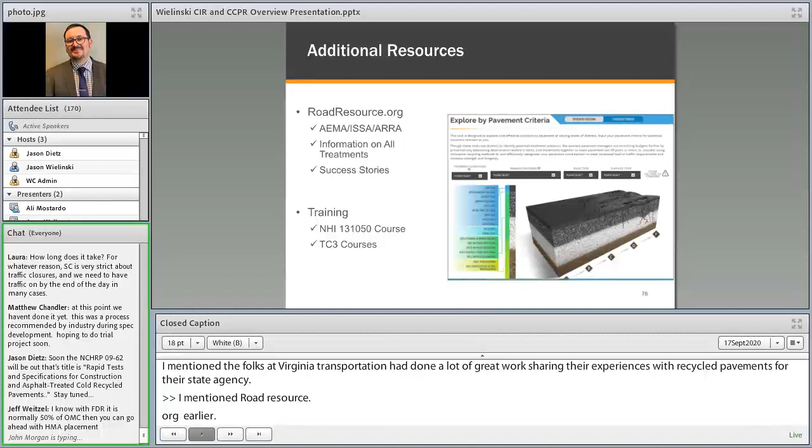I mentioned roadresource.org earlier. Again, great tool, a lot of great information on different recycling and pavement preservation treatments. I really like the success stories, so agencies can go there and see how other agencies have used these tools in pavement performance and how they've successfully been completed.

There's a lot of good training courses out there and available. NHI courses and TC3 courses are also available for everyone to better understand how these things are constructed and built.

Another tool I'm pretty fond of is one our DOT here in Indiana put together: a recycling treatment flowchart. They could look at pavement conditions based on assessments coming in, looking at the stresses, pavement type, and subgrade strength, and create a flowchart to help them understand which direction they should go on treatments. I've shared a link with everybody here to check that out. I think it's a really neat tool that our pavement designers are using to help identify good FDR, CIR, or FDR/CCPR type projects.

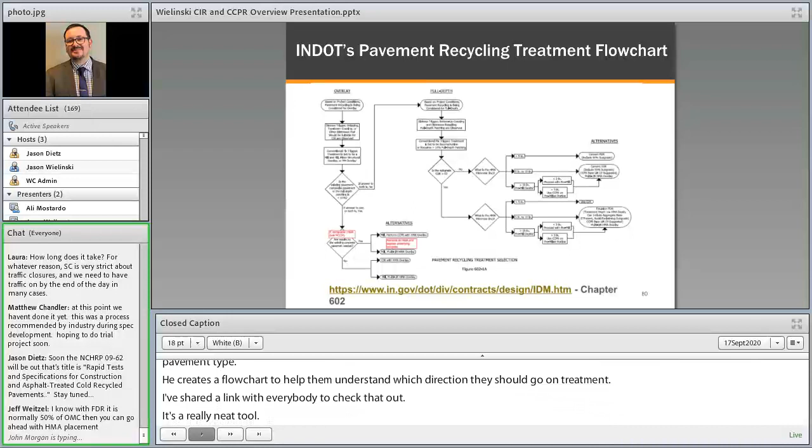The final thoughts: it's all about right road, right time, right treatment.

Agencies can save money with these processes. They can save construction time. They're not removing and hauling materials in and out that they've already invested in. We can extend the life of pavements with the materials that are already there in place, and help reduce maintenance costs by addressing cracking issues and distresses in the pavement all in place, building solid structural foundation layers for our overlays.

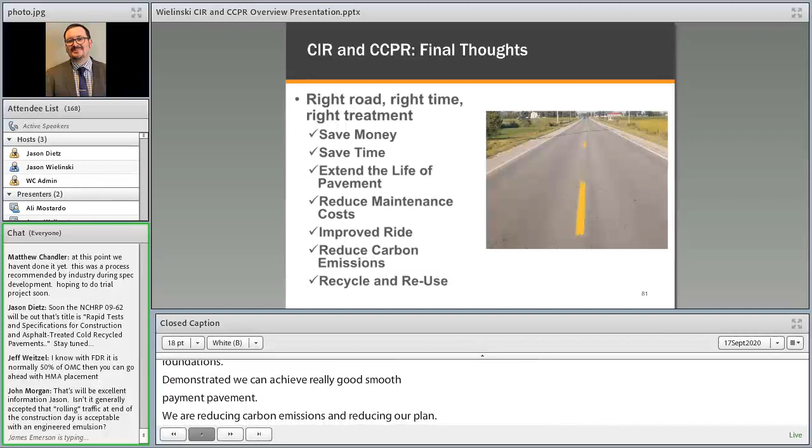We've demonstrated that we can achieve really good, smooth pavements for our traveling public, and we're going to continue to track and monitor the projects that I've talked about today. It's a feel-good story. We're reducing our carbon emission, we're reducing our footprint, and we're reusing materials, and reducing the demand for virgin materials on a lot of these projects. So just some final thoughts there on the recycling technologies in general.